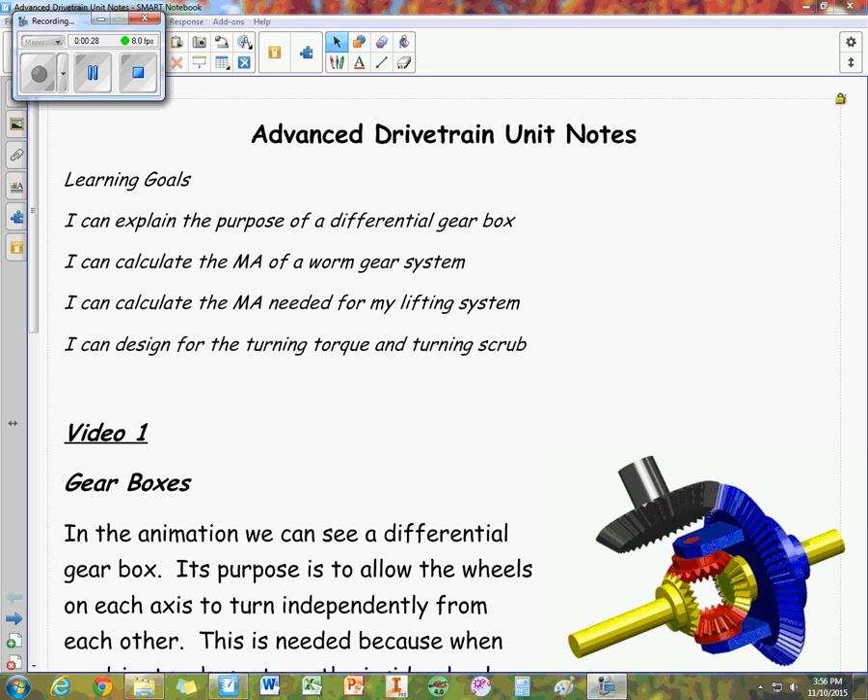The learning goals for this unit: I want you to be able to explain the purpose of a differential gearbox, calculate the mechanical advantage of a worm gear system, calculate the mechanical advantage needed for a lifting system, specifically yours if you have one, and design for the turning torque and turning scrub in a drivetrain. Let's get started with video 1.

Gearboxes. In this animation you can see what's called a differential gearbox. Believe it or not, this is what is inside the back of most pickup trucks, probably all pickup trucks, or rear wheel drive cars.

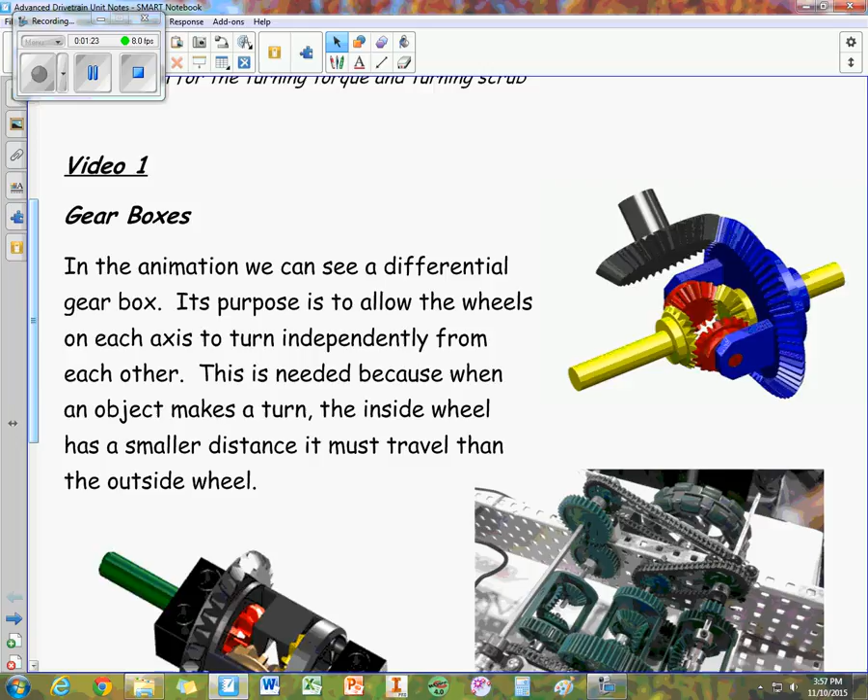The purpose is to allow each axle to turn independently from each other. We need this. If you have a four-wheeler and you go through your yard, you may notice it tears up the grass when you make a turn. It's not because you're purposely damaging the grass, it's because there's just one axle in the back of that four-wheeler. When it makes a turn, the inside wheels don't have to travel as far a distance as the outside wheel, and that means the inside wheel is being forced to turn through the same distance as the outside wheel, which causes you to tear up the grass even with a simple turn. Differential gearboxes fix that.

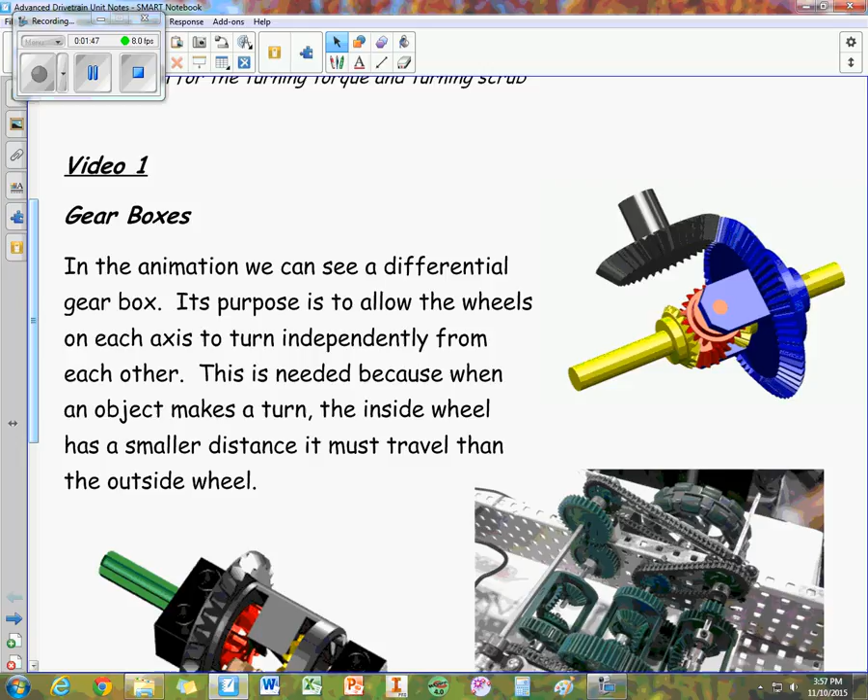And they do that using planetary gears. So in this first animation here, this first part right here is coming from the motor, and then these go to the wheel.

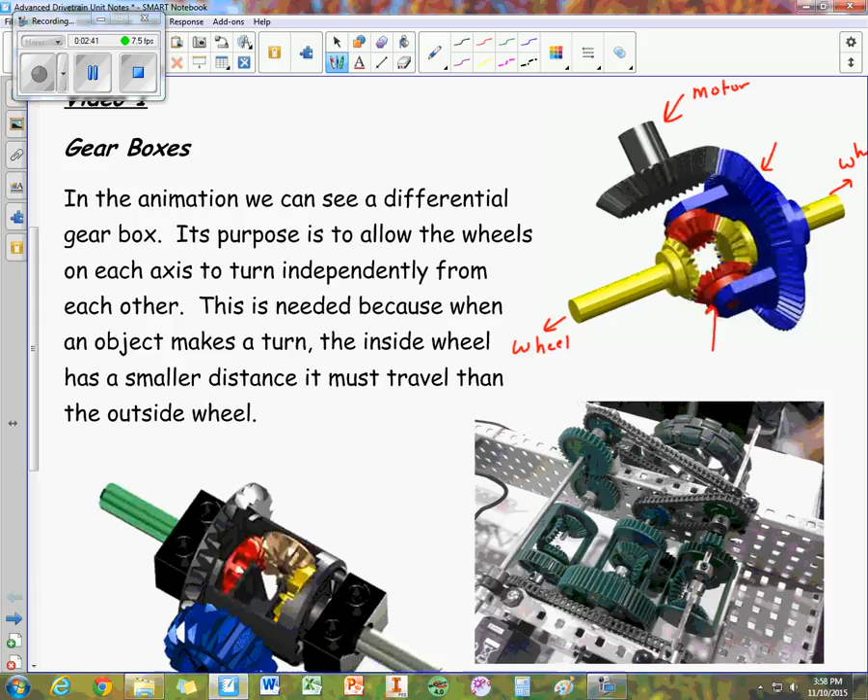So the motor starts with a crown gear, or rather a bevel gear, and we see this part turning here, which is connected to these red planetary gears swiveling around. What that allows us to do is as the motor turns the wheels, we can get independent motion because these planetary gears don't have to turn each gear at the same rate. A consequence of this though is that typically when you're driving, you only have power to one wheel at a time.

Here's another animation, I believe from Lego Mindstorms, but it's still a differential gearbox. Let this cycle through - here you can see the axles turning independently, one going clockwise, the other counterclockwise. Now they're forced to turn at the same time. If you ever have an electronic differential on a new car or truck, what that does is lock the rear differential together, just like it is right now, forcing both wheels to turn at the same speed, kind of like the four-wheeler example. That gives you a little more oomph if you're stuck in some mud.

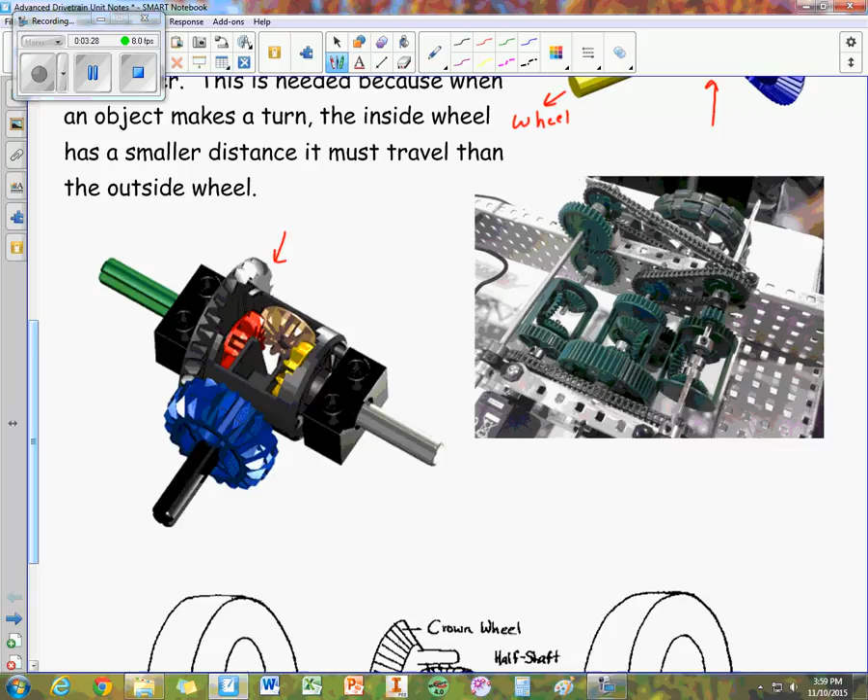Over here we can see a lot of differentials, I believe on this VEX system. This is a pretty complicated system - it looks cool, I'm going to have to build this. It looks like a lot of fun. But we have a differential gear system here.

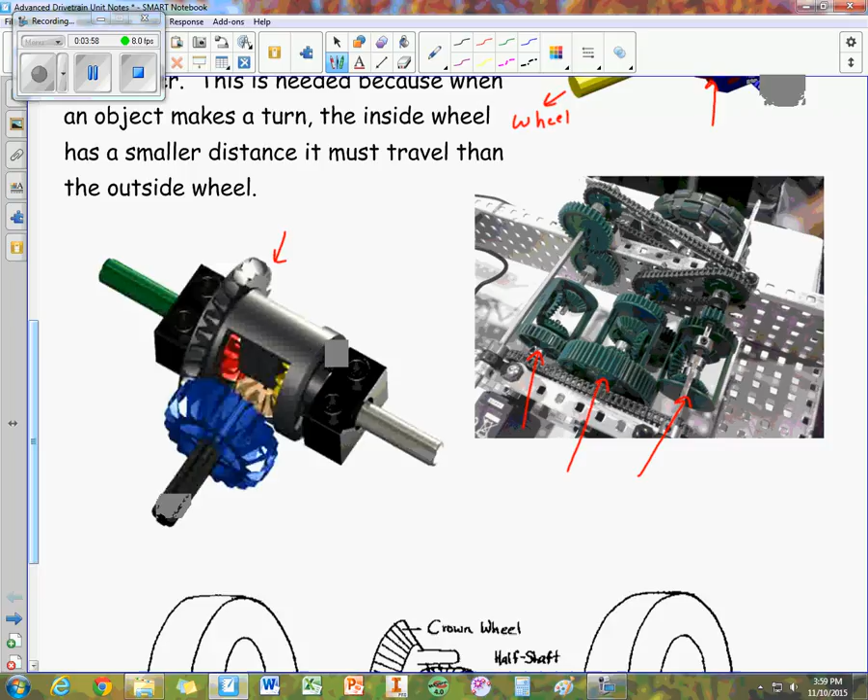So this first learning goal, the purpose of a differential gearbox - the purpose is to allow the wheels to turn at separate rates. That way you don't have to worry about scrub and the wheels hopping up and down when you're on a system.

So here we have a picture of this. What I like about this is it really goes through and describes all of the different parts. Notice we've got the sun gear, the planetary gears, a crown gear, transmission, the driving pinion - it even gives us a rough size here. So this is a pretty nice diagram of what's going on in the back of a car, and what you can also do with a robot.

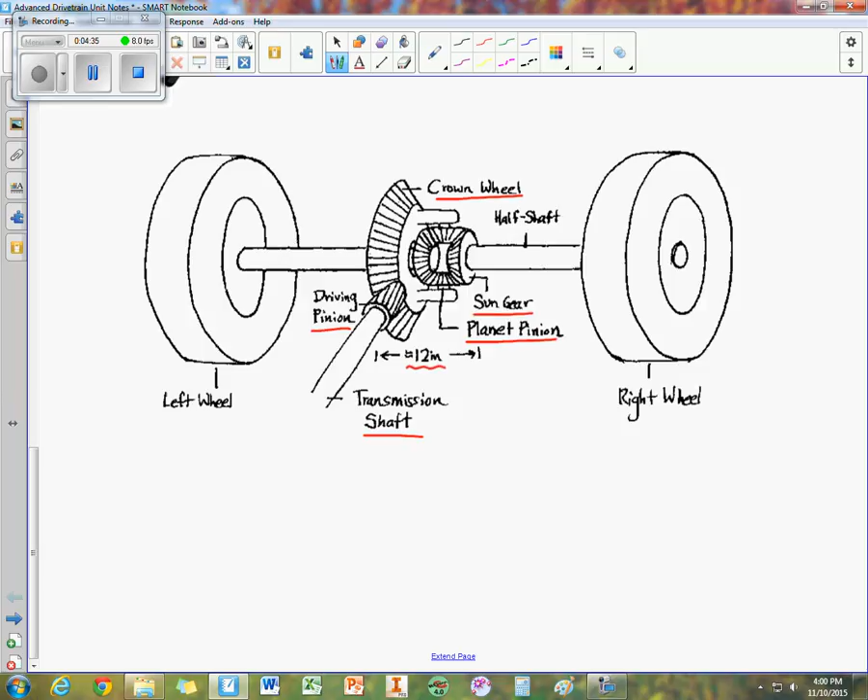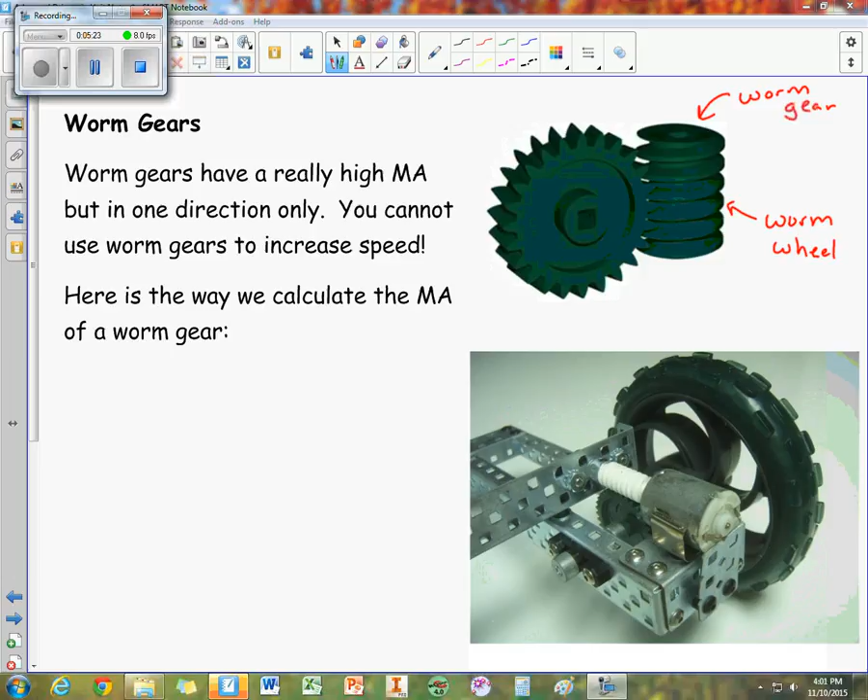Now, here's how we can calculate the mechanical advantage. It's a pretty simple formula. It is going to be the number of teeth on the worm wheel divided by the number of teeth on the worm gear. This is unique. It means it does not matter how many teeth are on the second spur gear. The worm gear does not care how many teeth are on that spur gear. Now, the number of teeth on a worm gear, because it's all one gear, is 1. So really, the mechanical advantage comes down to this.

How cool is that? I believe on the VEX system, the individual worm gear segments have 7 teeth on the worm wheel. So I believe their mechanical advantage is all 7, which is the same as a 12-tooth gear to an 84-tooth gear.

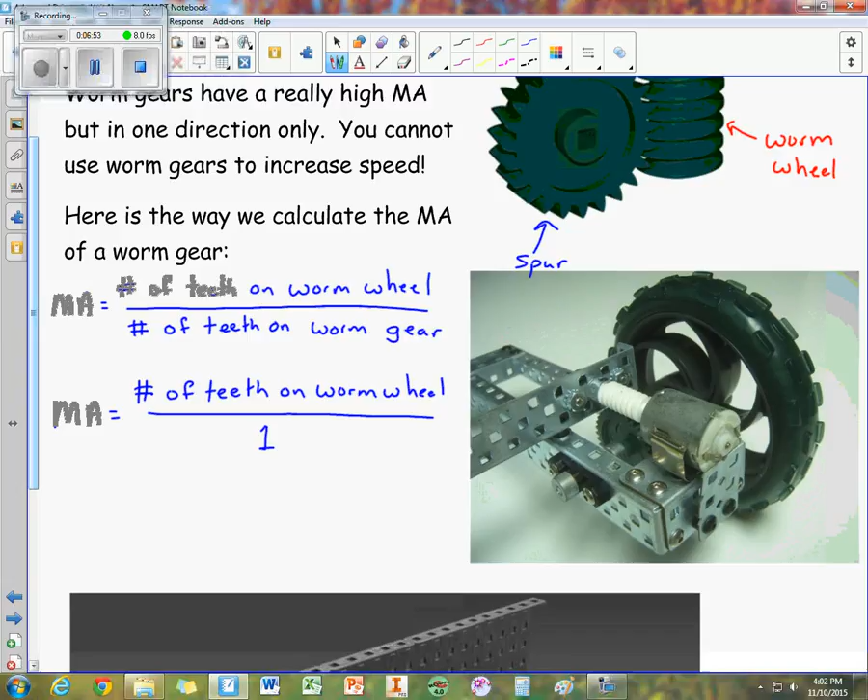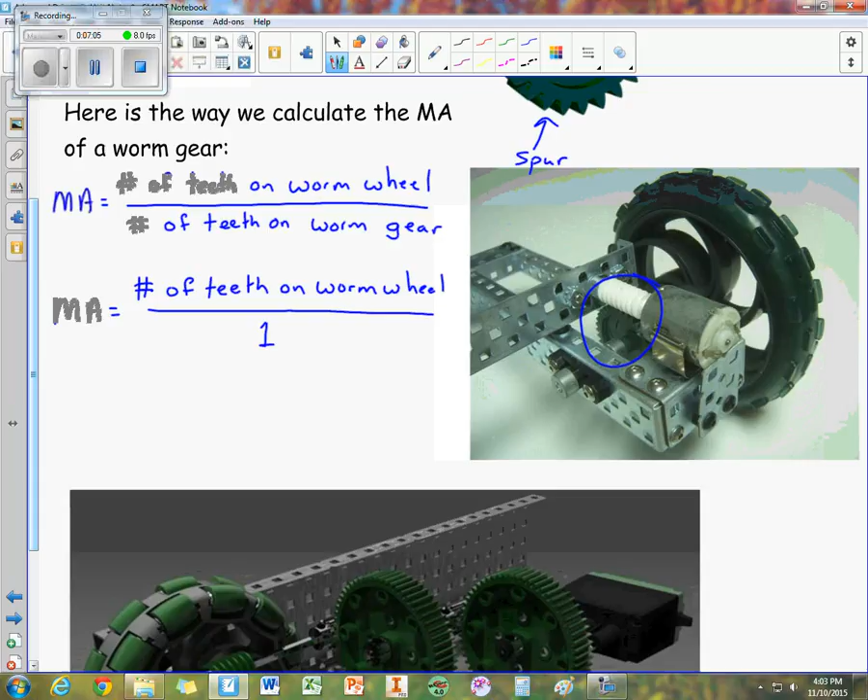All right, in this example here on the right, we can see how we have a motor with a worm gear attached to it. Now, something that we've experienced, but I haven't really mentioned in any notes: when the mechanical advantage is greater than 1, it becomes harder to backfeed.

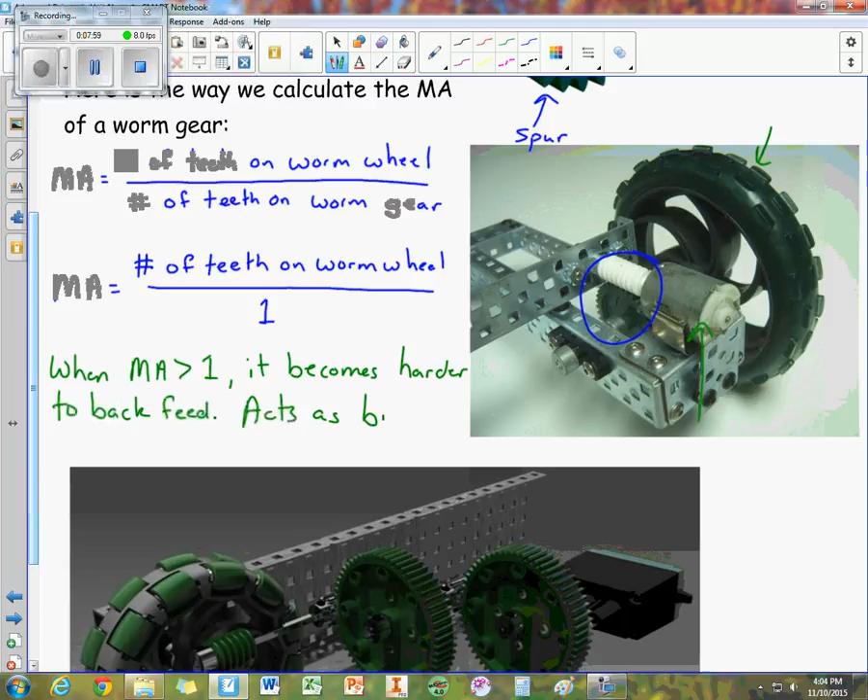And what I mean by that is if you were to grab a hold of this wheel, you would not be able to turn it. This motor can turn the wheel very easily, but the wheel will not be able to turn that motor. The mechanical advantage is too high. So, in other words, it acts as a brake. So at the end of competitions, if you were to pick up a robot and you wanted to leave it elevated so that it doesn't fall down, use a worm gear.

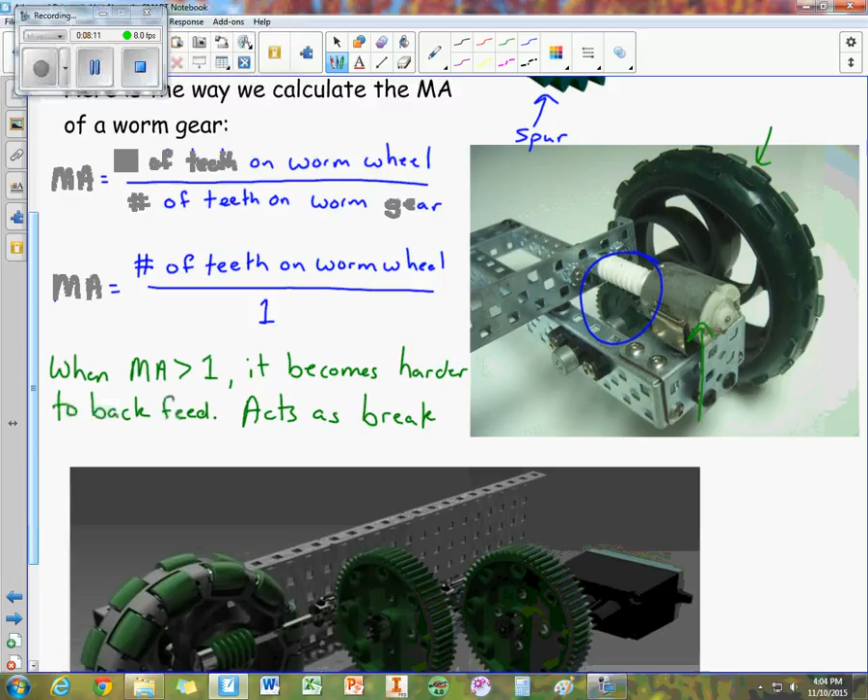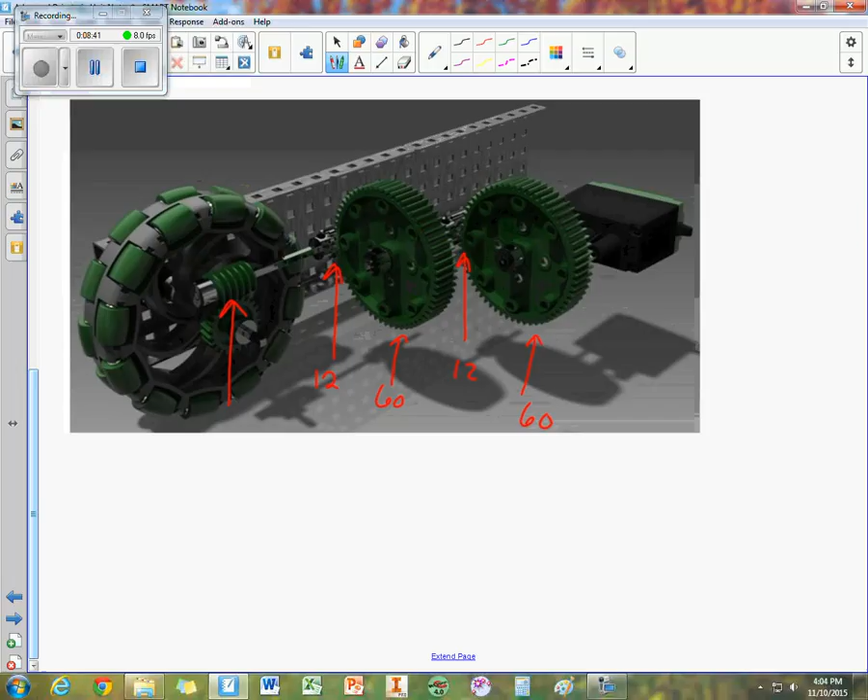Now let's take a look at this picture here. This is a little more complicated. But essentially what we have is our worm gear and our spur gear right here. And then we have a series of 60 tooth to 12 tooth gears. And I'd like to take a moment and calculate the mechanical advantage of this system. So what we want to do is remember that mechanical advantage is output divided by input.

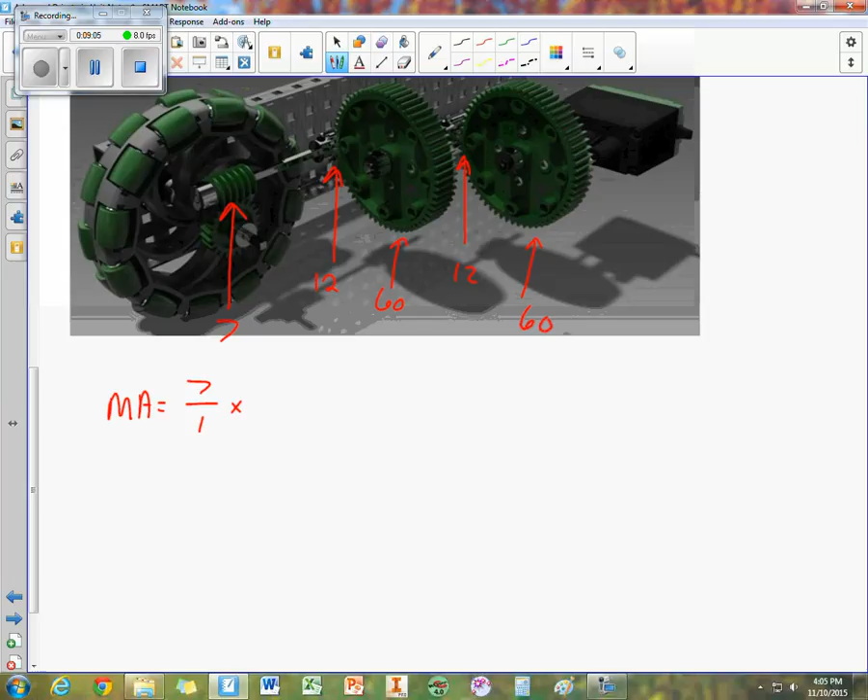And let's say that this little worm gear has 7 teeth on it. The mechanical advantage then would be 7 to 1, times 12 over 60, times 12 over 60. So do you guys see how it's output over input, output over input, output over input? And when you do this, you get a mechanical advantage of 0.28.

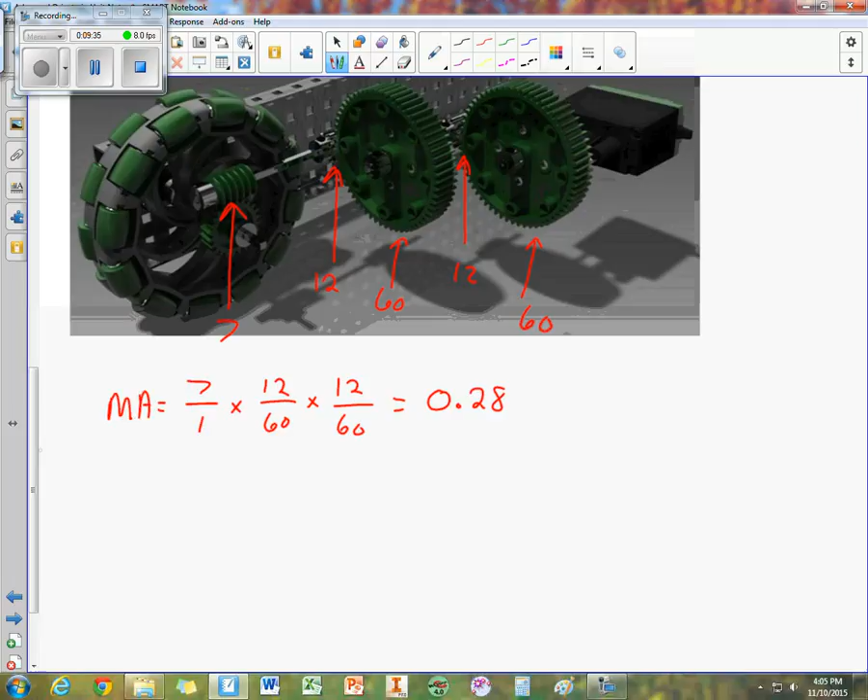Now, what this means is that the system is actually built for speed instead of torque. When we go through and do some of our math, the output torque equals the input torque times mechanical advantage. So if that were a 393 motor, the input torque of a 393 is 1.67 Newton meters. So we get 0.47 Newton meters of output torque.

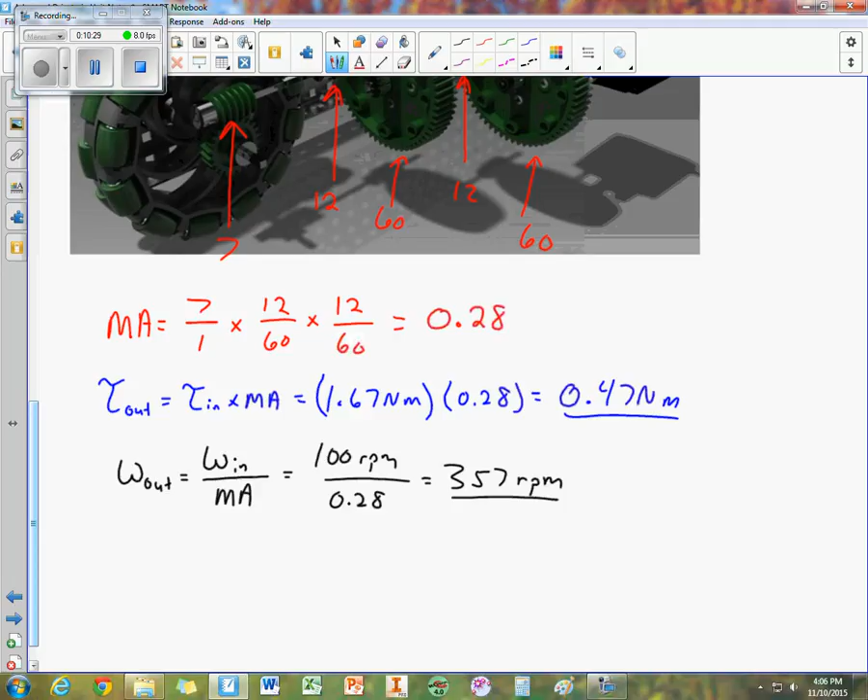The output speed equals the input speed divided by the mechanical advantage. So for a 393 motor, that's going to be 100 RPM divided by 0.28. So the output speed will be 357 RPM. So this is one way we can use a worm gear for speed, but notice we had to use a compound gear system in front of it to accomplish that.